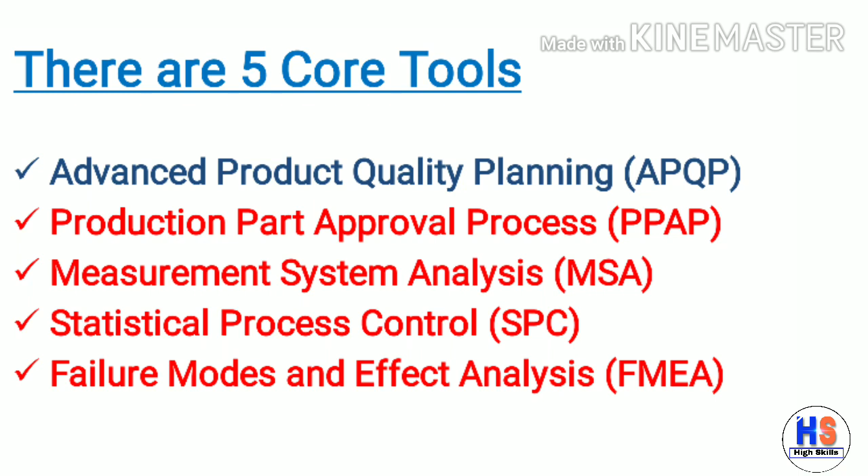Second one is PPAP, Production Part Approval Process. Third one is MSA, Measurement System Analysis. Fourth one is SPC, Statistical Process Control, and fifth one is FMEA, Failure Modes and Effects Analysis.

So first let's discuss the fundamentals of product quality planning. First is organize the team. Second is define the scope. Third is team to team communication. Fourth is training. Fifth is customer and organization involvement.

Sixth is simulation engineering. Seventh is control plans. Eighth is concern resolution. Ninth is product quality timing plan, and last one is plans relative to the timing chart.

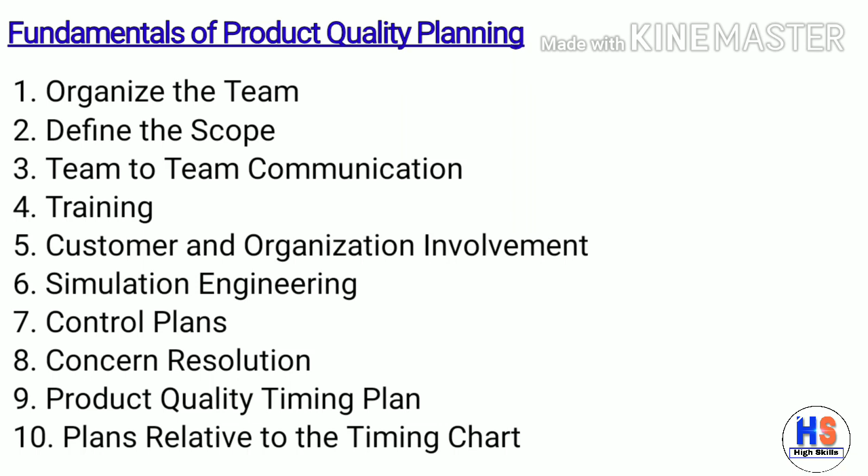What is APQP? APQP, which is Advanced Product Quality Planning, is a structured approach that is used to design and develop the product and process to meet the customer needs and expectations. Advanced Product Quality Planning is extensively used by automotive industries to assure quality and performance through effective planning.

APQP is a framework for developing new products. APQP is one of the important core tools among the 5 core tools of IATF 16949:2016. APQP serves as a guide in the development process and also a standard way to share results between organizations and their customers.

APQP covers design robustness, design testing and specification, compliance, production process design, quality inspection standards, process capability, production capacity, product packaging, product testing, and operator training plan, among others.

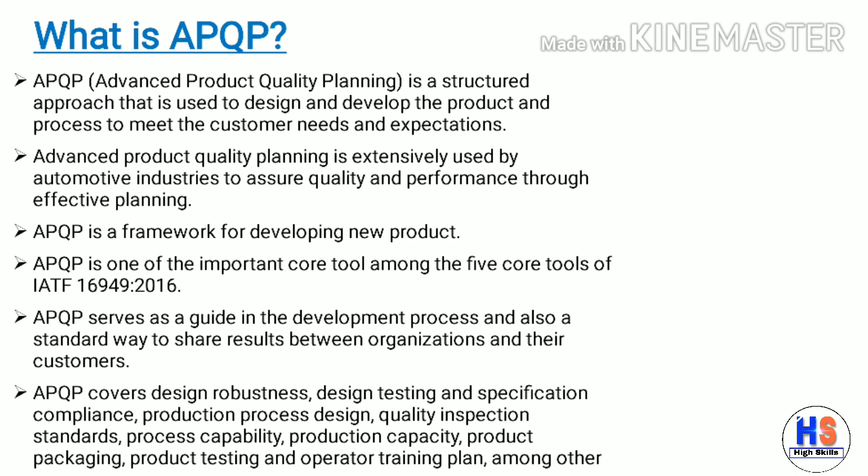Now, what is the history of APQP? The Big Three, which are Ford, General Motors, and Chrysler, developed the process of advanced product quality planning in the late 1980s. Initially, the representatives from the Big Three and the Automotive Division of the American Society for Quality Control, which is ADQC, developed the quality requirements for automotive suppliers.

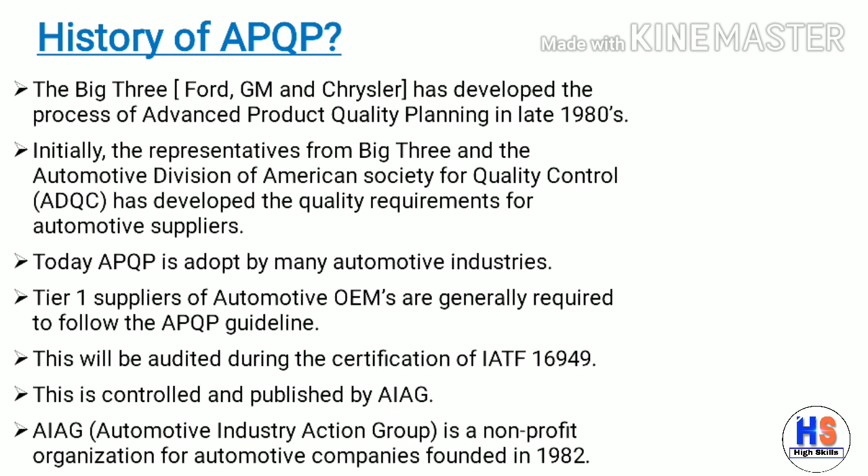Today, APQP is adopted by many automotive industries. Tier 1 suppliers of automotive OEMs are generally required to follow the APQP guideline. This will be audited during the certification of IATF 16949. This is controlled and published by AIAG. AIAG, the Automotive Industry Action Group, is a non-profit organization for automotive companies founded in 1982.

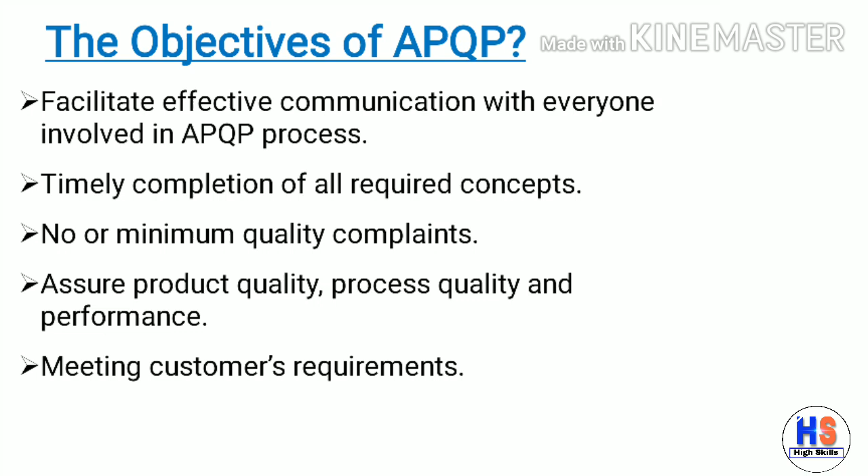So friends, it is very important to know the objectives of APQP. The first one is facilitate effective communication with everyone involved in the APQP process. Second one is timely completion of all required concepts. Third one is no or minimum quality complaints. Fourth one is assure product quality, process quality and performance. And fifth one is meeting customers' requirements.

So let's discuss the main focus points of APQP. The first one is understanding the customer needs and expectations. Second one is APQP focuses on proactive approach and corrective action. Third one is designing within the process capabilities.

Fourth one is analyzing and mitigating failure modes. Fifth one is verification, validation and design reviews. And sixth one is control on special critical characteristics, which are CTQs or CTPs.

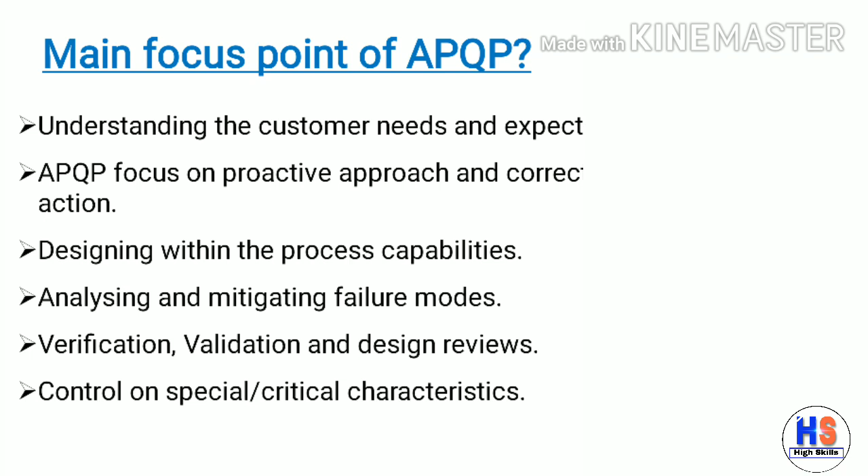Friends, it is very important to understand the concept of the product quality planning cycle. APQP always works on the PDCA cycle. PDCA is a plan, do, check and act cycle. Let's see how APQP is integrated with the PDCA cycle.

See here, in the plan phase there is plan and define. In the do phase there is product design and development and process design and development. In the check phase there is product and process validation, and in the act phase there is feedback, assessment and corrective action.

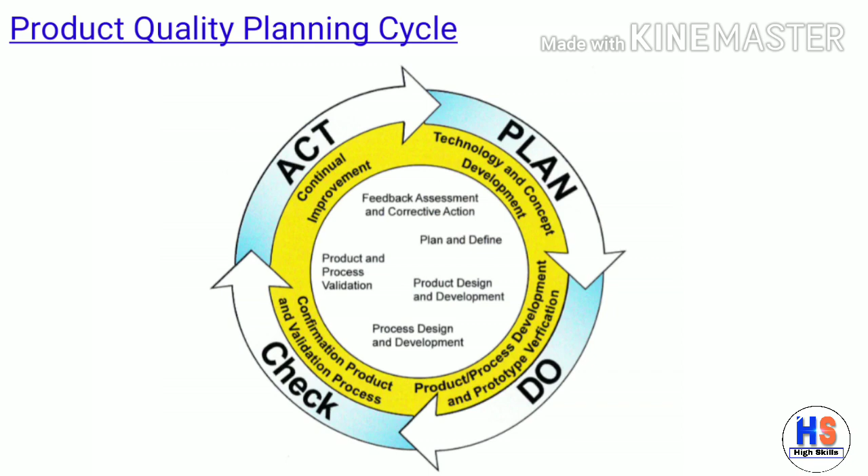Also you can see here technology and concept development is engaged with the plan phase. Product and process development and prototype verification is engaged with the do phase. Confirmation, product and process validation is engaged with the check phase, and continual improvement is engaged with the act phase.

So friends, let's discuss what is the APQP timing chart. In APQP there are 5 phases. First phase is plan and define program. Second phase is product design and development verification. Third phase is process design and development verification. Fourth phase is product and process validation. Fifth phase is feedback, assessment and corrective action.

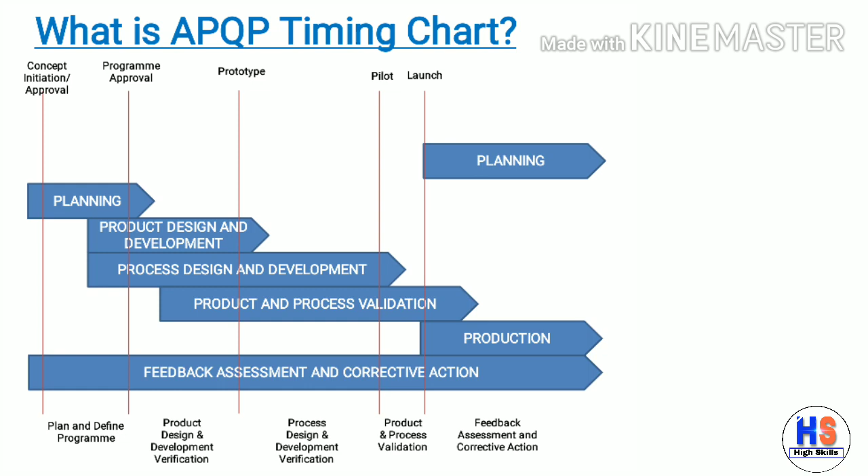What are the 5 phases of APQP? The 5 phases of APQP are mentioned below. First is plan and define program. Second is product design and development. Third is process design and development. Fourth is product and process validation. And fifth one is feedback, assessment and corrective action. So let's discuss these 5 phases briefly one by one.

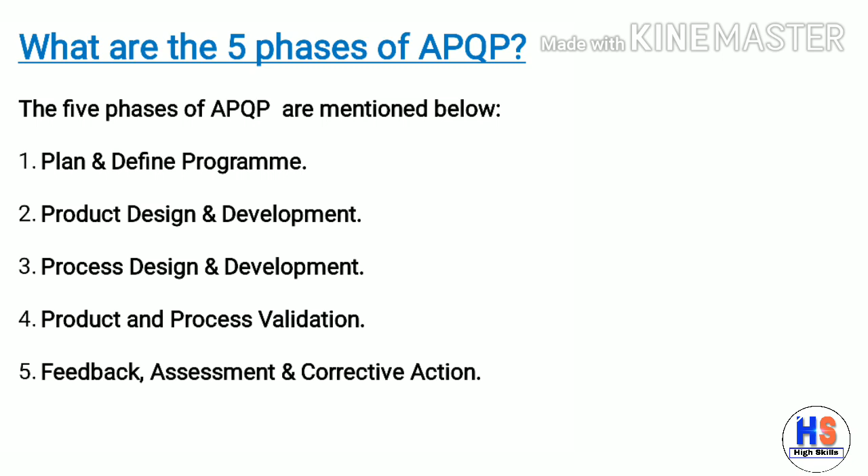Phase 1 is plan and define program. The purpose of this phase is to ensure that customer needs and expectations are clearly understood. If I talk about the inputs of this phase, the first one is understand the voice of customer. How can we understand the voice of customer? By gathering the information. How can we gather the information? By doing market research, historical warranty and quality information, and team experience.

Second one is business plan and marketing strategy. We need to understand the business plan and marketing strategy of our customer. Third one is product and process benchmark data for setting the performance target for products and processes. Fourth one is product and process assumptions for assuming certain features, design and process concepts of the product. Fifth one is product reliability studies. Reliability means to continuously meet the requirements of the customer.

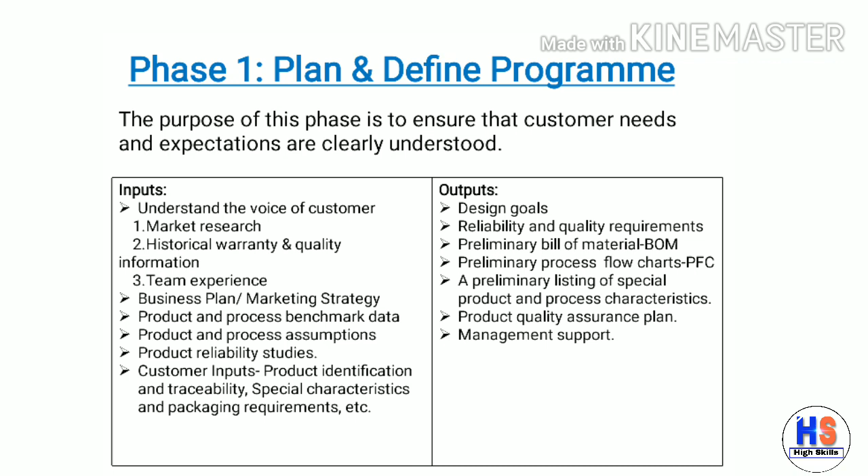What will be the outputs of this phase? First one is design goals. Second one is reliability and quality requirements. Third one is preliminary bill of materials. Fourth one is preliminary process flow charts. Fifth one is a preliminary listing of special product and process characteristics. Sixth one is product quality assurance plan, and seventh one is management support.

Next is phase 2, product design and development. The purpose of this phase is to develop design features into nearly the final form of the product. As you can see here, the inputs of this phase are the same as the outputs of the plan and define program phase. So what will be the inputs of this phase? First one will be design goals. Second, reliability and quality requirements. Third, preliminary bill of material. Fourth, preliminary process flow charts. Fifth, a preliminary listing of special product and process characteristics. Sixth, product quality assurance plan, and seventh, management support.

If I talk about the outputs of this phase, then the outputs will be DFMEA, design failure modes and effects analysis; DFMA, design for manufacturability and assembly; DVP&R, design verification plan and report; design verification through prototype model; design verification through product testing; prototype control plan; engineering drawings review; engineering specification review; material specification review; drawing and specification changes; target setting for productivity and process capability; gauge testing equipment requirements; new tooling, equipment and facilities requirement review; and team feasibility commitment sign off.

Phase 3 is process design and development. The purpose of this phase is to develop an effective management system to assure that customer needs and expectations are met. The inputs of this phase will be the same as the outputs of the product design and development phase, which are DFMEA, DFMA, DVP&R, design verification through prototype model, design verification through product testing, prototype control plan, engineering drawing review, engineering specification review, material specification review, drawing and specification changes, target setting for productivity and process capability, gauge testing equipment requirement, new tooling, equipment and facilities requirement review, and team feasibility commitment sign off.

And outputs will be PFD, process flow diagram; PFMEA, process failure mode and effects analysis; pre-launch control plan; floor plan layout; packaging standards; measurement system analysis plan; data for quality, reliability, measurability and maintainability; method of rapid detection and feedback; and result of error proofing activities.

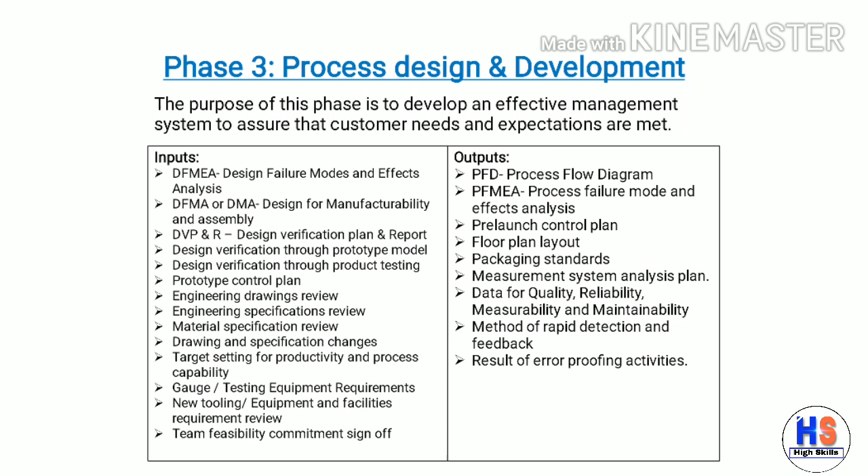Now move to the next phase, phase 4, product and process validation. The purpose of this phase is to validate the manufacturing process with the help of a production trial run and to finalize the production control plan. Inputs of this phase will be PFD, PFMEA, pre-launch control plan, floor plan layout, packaging standards, measurement system analysis plan, data for quality, reliability, measurability and maintainability, method of rapid detection and feedback, and result of error proofing activities.

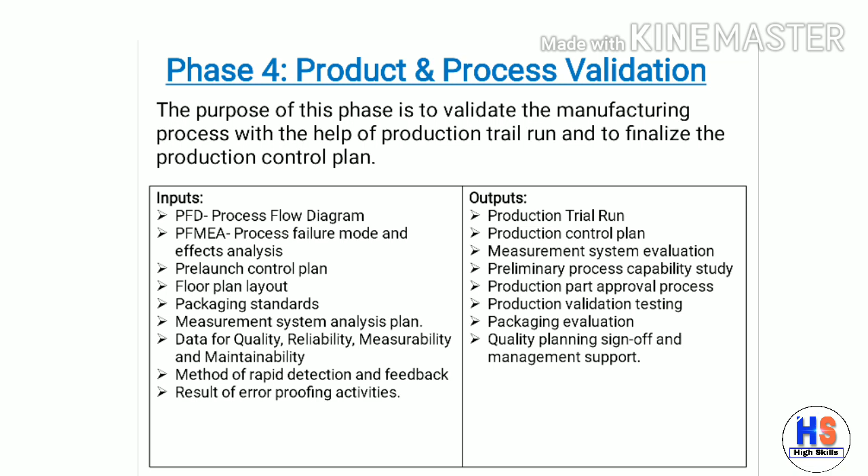And the outputs will be production trial run, production control plan, measurement system evaluation, preliminary process capability study, production part approval process, production validation testing, packaging evaluation, quality planning sign off and management support.

Now move to the next phase, which is phase 5, feedback, assessment and corrective action. The purpose of this phase is to make continual improvements in the product and process to enhance customer satisfaction levels. Inputs of this phase will be production trial run, production control plan, measurement system evaluation, preliminary process capability study, production part approval process, production validation testing, packaging evaluation, quality planning sign off and management support. And the outputs will be reduced variation, both common and special cause variation, improved customer satisfaction, improved delivery and services, and effective use of lessons learned and best practices.

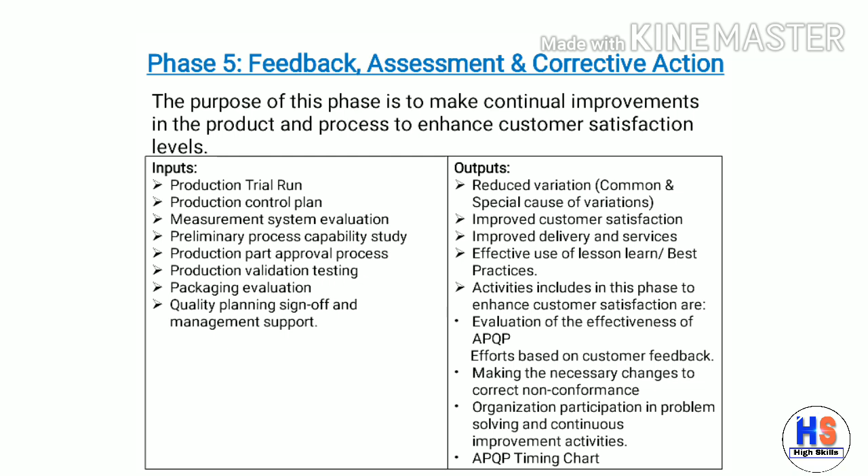Activities included in this phase to enhance customer satisfaction are evaluation of the effectiveness of APQP efforts based on customer feedback, making the necessary changes to correct non-conformance, organization participation in problem solving and continuous improvement activities, and the APQP timing chart.

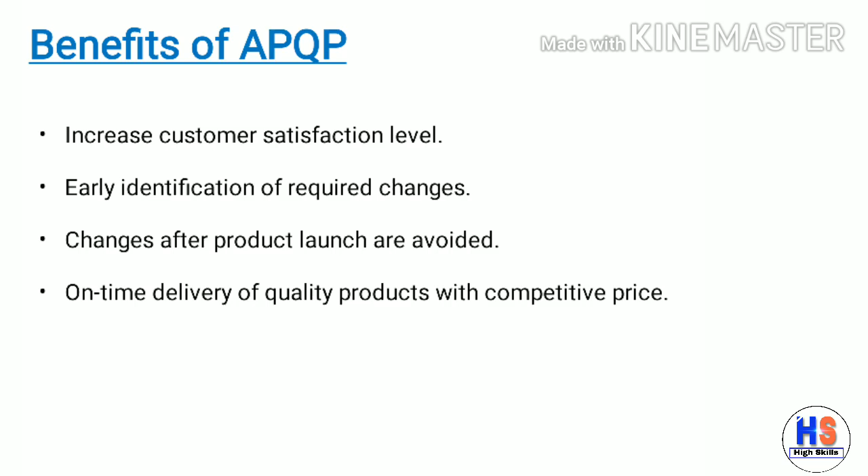So friends, what will be the benefits of APQP? First benefit will be increased customer satisfaction level. Second will be early identification of required changes. Third, changes after product launch are avoided. And fourth will be on-time delivery of quality products with competitive price.